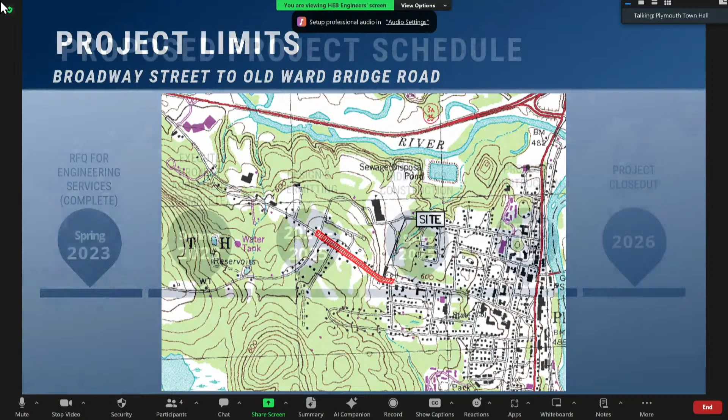To review where we are in the project: it started with a request for qualifications for engineers in spring of 2023. We executed our contract with the town, HEB was selected in summer of 2023, and we are now in the design and permitting phase of this project. There are 3 chunks of design and permitting.

The first chunk is an engineering study where we look at alternatives. That is then reviewed, and a preferred alternative is selected by the community. We then submit that to DOT for their review, and when they review and provide us with authorization to move into preliminary design, we will start getting into some detailed design activity and permitting for the project.

Then there's another review by DOT, and then we would get into preparation of construction plans, project manuals, contract documents, and all of that for bidding, ideally in spring of 2025. This project is anticipated to be executed during the construction season of 2025.

So far in this process, we've had several meetings. We had the local concerns meeting where Aaron and I were here on January 8th to hear what the community's concerns were for this section of Highland Street.

We took that information, processed it, and started looking at what alternatives exist for Highland Street. The themes that came up were sidewalk access during construction, vehicle speed on the roadway, crosswalk improvements for pedestrian refuge, intersection improvements around the school intersection, and maintenance during poor weather conditions.

So the bottom left is going up the hill and the top right is on the top of the hill? The bottom right is the intersection with Broadway. Right, got that. Then you go up from that one. If you're on the bottom right, you go to the one above it. That would be coming up around the corner, around the curve, which is on the right-hand side of that screen. And then you'd go to the bottom left. These are actually plans that would be on top of each other, and they don't sit well side by side on a screen, but it's top to bottom on both of them.

Similar considerations for our second roadway alternative. The primary difference is that we would be looking at matching the 5-foot wide shoulder that exists above the Old Ward Bridge Reservoir Road intersection and below the Broadway Street intersection. Everything else is the same, except that with the wider road, we're probably encouraging higher vehicle speeds. So the benefit of the narrower road section is that we would likely encourage lower vehicle speeds, which is better for the kind of area we're at and the conversations that we heard from everybody at our previous meeting.

Material selections, same consideration. We're again going to have the same sidewalk and granite curb as the previous alternative, but we also looked at a full depth reconstruction and a reclaim option for this as well.

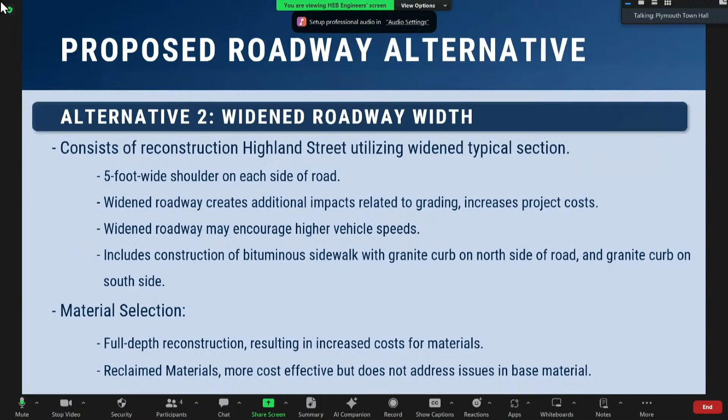In this alternative, you'll see, I pointed out the top right, you can see on the right-hand side the curve. That green area, if we widen the road, is the limits that we would have to chase grading outside of our roadway right-of-way to tie back into existing grades. So much larger impacts on private property in this area, and just a harder construction process. There's 20 feet of grade there, if not more, down to the bottom that we would have to chase for quite a while. That was one of the detractions from this, there's an extensive construction cost that goes along with wider roadway surface, wider shoulders, more grading. So it was a much more costly alternative to look at.

You'll also notice in the top left, similar to the last one, we're not showing any improvements on the Reservoir Road, Old Ward Bridge Road in these plans, because we felt like those were standalone alternatives. So we're talking about the roadway reconstruction, and as I progress through this conversation, we'll talk about the intersection reconstruction. So basically, what we did is we created two projects, and to create one project, you just pick your favorite one here and add them together. That's how we broke out our analysis, so that we could analyze alternatives, because the intersection itself is its own project to think about, and it's a little different than just roadway reconstruction and sidewalk, to think your way through the considerations of a misaligned intersection with heavy pedestrian traffic and heavy vehicle traffic and all of that. So we'll get to those points.

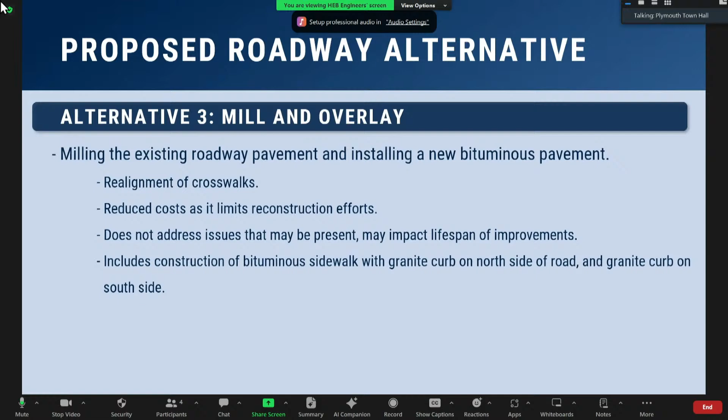Questions or no? I'll take questions whenever. If you're going to ask a question, could you go to the microphone just so we can make sure it's captured? I'm Steve Rand from town. Thank you.

So I'm interested in the cross-section of this here, because what we're saying is that there's going to be a white stripe on the edge of the roadway, 11 feet wide, and then there's going to be some space between there and the curb, which protects this pedestrian sidewalk, right? So how much space between the white line and the curb? Because we have none now, right?

2 feet. Right, so we're 2 feet? 2 feet. So that's a little margin for safety, and it does the narrowing thing that you're talking about. And it's going to be uniform throughout, right? Yes. So you're going to continue to do that? Yes. The center line stays about where it is? Yes. Okay, perfect, thank you. No problem.

It's actually a pretty good spot if anybody else had questions, because that covers pretty much the whole roadway section before we get into the intersections - that's actually a great call out. Does anybody have any questions before we move into the intersection portion of this? Comments? Thoughts? The exciting part. Yeah, please.

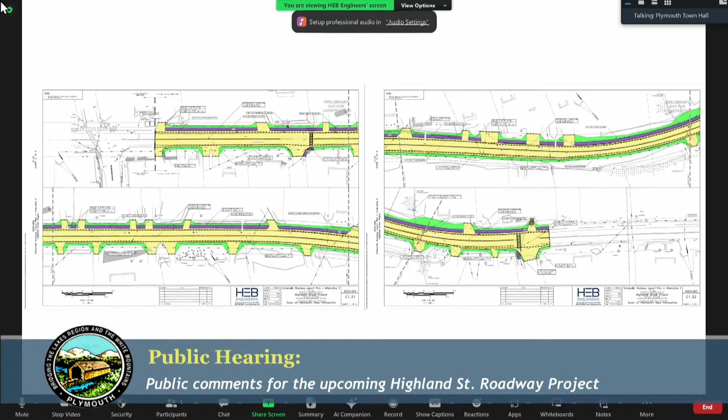Bill - so I think last time you mentioned that you're going to redo the grading so it won't encourage like a bank and a racetrack, banking the other way? We're looking at that as part of the design considerations. It's not part of the alternative analysis, but what we're going to do is ensure that our roadway cross section, whether it's crown, super elevated, or however we handle that, will be addressed when we get into preliminary design. It'll meet appropriate standards. We've had our transportation engineer take a look at it already and start navigating through his thought process, but the fine details are not solidified yet.

Hi, Jen Schmidt, representing Lakes Region Mental Health Center. We're at 81 Highland, so I believe we're just below where the project's going to start. Just wondering about implications for access - I imagine we're right at the foot of where the staging and equipment's going to be. Do you anticipate any obstacles, issues, or power cutoff that could impact our patients accessing the facility?

No, access to facilities, electrical, all of that should remain as they are. Again, it's a construction project, so there'll probably be one lane of traffic at one point in time, but access to all facilities, driveways, residential or commercial, will be maintained. There should be no utility issues. There will be driveway work, so during the process, the construction engineer and the contractor will communicate - hey, we're going to be here at this time - which is just part of the game. But no, everybody should have access to everything, there will be no cutoff.

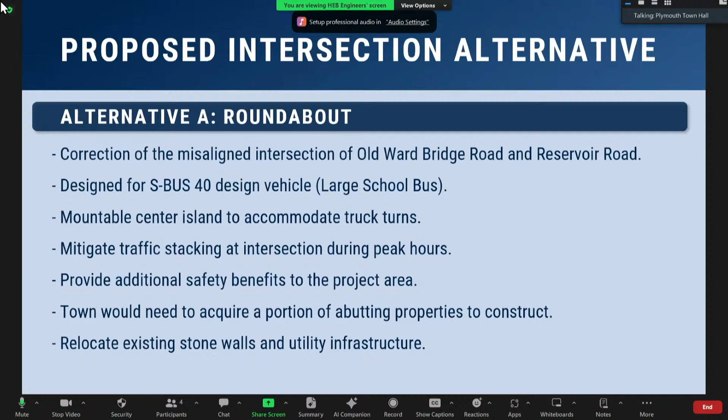So it does have some downsides. All four corners require some property acquisition on the town's behalf—there's actually no way to correct the intersection without property acquisition at some level. That's part of the conversation here. There's also some utility infrastructure, poles, and stone walls in the area that would need to be accommodated.

You can't have a single crossing guard then, right? Well, I would think you'd stand in the middle. As soon as that's the case, would you still need the crossing guard? Well, they're not going to be stopping. I would think you'd eliminate the crossing guard. No, I would still think you'd need one—there's too much volume there, with a bunch of cars coming out of the school. It's just going to keep going and not stopping.

Sorry, comment from the public here as you guys are debating this. My name is Elizabeth Taylor, Plymouth resident and facilities manager for the high school. We met at the town officials meeting. My guess from talking with other people at the school is we need a crossing guard there. If you've got a rotary—which I personally like the idea of, though I'm not saying the school does—we have to have a crossing guard. I'm not saying it has to be a police officer, but we have so many little kids who are walkers through there. This will slow the traffic down, but we still have to get those kids across—you can't ask them to read when it's a good time to step out in front of a car. I just want us to keep that in mind.

Thank you. Yeah, we had that conversation in our meeting with the school district and our meeting with the town last week, about whether a crossing guard, or somebody, would be there. We weren't going to make that call, but it might be prudent.

I would think, though, that the crossing guard's job would suddenly be about helping manage people crossing, rather than stopping traffic. You're not doing traffic control generally—you're trying to keep traffic moving and helping people cross the crosswalks, which are offset from the intersection, similar to what happens at the bottom near Broadway. We have an officer there who helps people across the sidewalk but isn't standing in the street directing traffic.

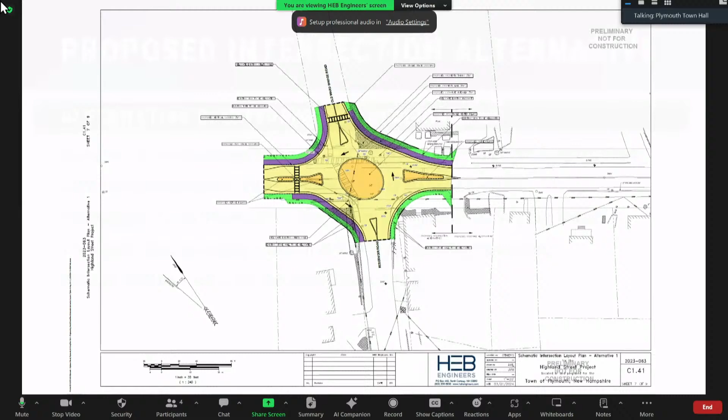Which we'll get to. So this is what it would look like based on our initial conversations—a quick look shows it would be sort of an oblong, oval roundabout for the vehicle movements through. The second alternative we looked at was realigning the intersection.

Basically, what we were looking to do is realign Old Ward Bridge Road to meet Reservoir Road at its current location, because there's less constriction on either side of Old Ward Bridge Road at that intersection. This would allow the two roads to enter Highland Street at the same location.

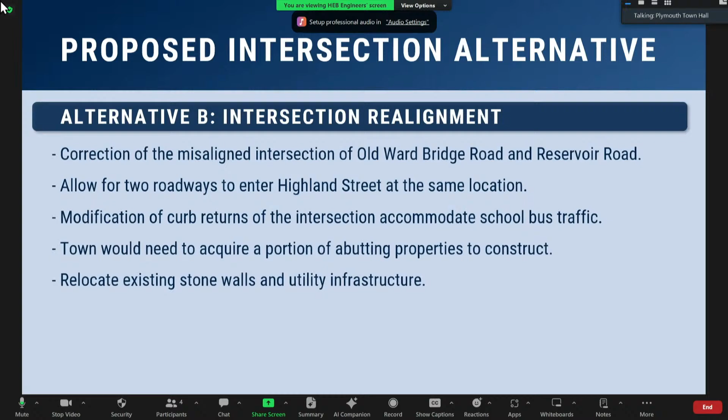We would modify the curb returns to make sure that it would accommodate school bus traffic getting into that right-hand turn into the school and getting out without crossing traffic and creating more conflict. There is still some property acquisition required as part of this, and again, not as significant relocation of stone wall.

So on the top right of this would be the jog that we would look at for Old Ward Bridge Road to come in and meet, as close as we could get it, Reservoir Road. We looked at this because Reservoir Road is pretty well sandwiched between two residential properties, and jogging it around is just not feasible.

Whereas the driveway into Old Ward Bridge Road has a little bit more undisturbed area on either side of it that we can shift into. Now, again, these are proposed alternatives. We have not had detailed conversation with any property owners at this point in time. I'm not aware if there are any in the room, but I'm sure we'd find out shortly. But these are the conversations for these alternatives to really correct what's going on at that intersection the way everybody has asked us to do.

Now, in this circumstance, this alternative does not reduce traffic speeds. It does give us a better turning movement into Old Ward Bridge Road, but it's still a straight shot right through Highland Street. So while we have narrower road widths, there's still nothing slowing traffic down there.

We have addressed the crosswalk locations a little bit by making them 90 degrees and in the mouth of roadways versus diagonally across and landing in the same place. So there is some minor adjustment there, and the reconstruction of the landing areas so there's appropriate pedestrian refuge when you get out of the intersection. But this intersection will generally operate the way it operates now, just will be aligned. So it'll create less awkwardness as you're entering Highland Street, but doesn't meet a lot of the goals as far as improvements in vehicle speeds and pedestrian safety.

I do have a question for you. I see this keeps the pedestrian walkway on what would be the right side of the road, which means anybody walking up Reservoir Road would have to cross the road yet again in order to be walking on the proper side of the road, because there's no sidewalks on Reservoir. Correct. And so I think that's a thing that we need to think about in this design, is that we're asking someone to then cross the road again where there is no crosswalk to do so.

So from Reservoir, can you repeat? Normal pedestrian walking traffic, walking towards the intersection, walking towards traffic, they should be on the left. But this crosswalk from Old Ward Bridge Road takes them onto the right side of Reservoir Road. So to exit the intersection, if they're walking up Reservoir, they'd have to cross again. But they're on the correct side if they're going down. So because there's no sidewalks on Reservoir Road, you're going to create that conflict one way or the other.

Right, that's the nature of the beast. Unless we built a sidewalk -- there's no sidewalk on Reservoir at all, though, other than that first little section. I've seen people basically have to come here, look and cross carefully, and then go up, because that's the right side they should be walking on, with no sidewalks. Just wanted to bring that up.

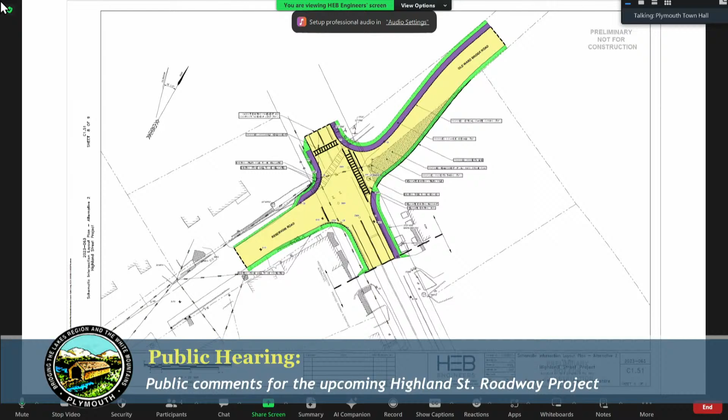And then the last alternative we looked at was just reconfiguring the pedestrian crossings at the existing intersection. This would create putting the pedestrian crossings in the right location. We'd reconstruct the intersection in kind, in its current geometry. We would also construct better landing refuge for pedestrians, so you'd get better sidewalk infrastructure, better crosswalk locations, and you'd gain a little bit of safety improvement for pedestrian crossing, similar to the last option.

You don't gain the safety improvement of the vehicle movements coming into an aligned intersection, because we're still misaligned, and you're not gaining any of the vehicle speed adjustments that you'd get from a roundabout. So it's kind of the same intersection you have now, rebuilt with better crosswalk locations, is essentially what we have. So it looks a lot like this. We've got Reservoir Road on the bottom.

Crosswalks are almost exactly the same as the previous option, except we're not shifting Old Ward Bridge Road over. This option doesn't have significant property acquisition, though there's still a little bit on the corner looking toward Highland on Reservoir, on the left corner, to build the safe landing area for the sidewalk. The other three corners of the intersection remain as they are, with no significant impacts. So it would be new, with more appropriate sidewalk and crosswalk locations.

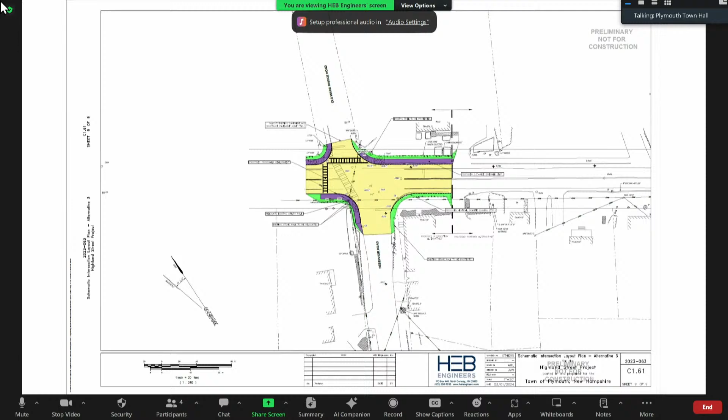Similar to the last alternative, here are the costs for these three alternatives. You've got a roundabout alternative for about $1 million. You have a realigned intersection for about $970,000, so about $1 million. And then you've got the reconfigured pedestrian crossings for $520,000.

Let me touch on that $520,000 cost. Because we didn't include the intersection, it doesn't seem like it would cost that much just to realign the crosswalks, but we didn't include the reconstruction of the intersection in our other estimates, so that's part of this cost—the actual rebuilding of the roadway in that area. That's baked into all three options: the work necessary to build the intersection, independent of the option chosen. Is that cost the full depth cost? That's on that one, full depth for the intersection. Yeah, it's full depth on that one, so there may be some cost savings there.

But if we go to the next one, we're still at about $1.9 million. If you chose all the cheapest options—the mill and overlay with sidewalks, and the realignment of the intersections—you're at about 1.9, and I'll get to that.

So the next steps for us are to continue talking about what our preferred options are, typically with town staff. I'm expecting to hear a little of that here tonight, so we can build off of that. Then HEB, the town, and DOT will get together and try to figure out our options. The funding is not adequate to meet the needs of the project in any of the options, and we need to figure out how to get there.